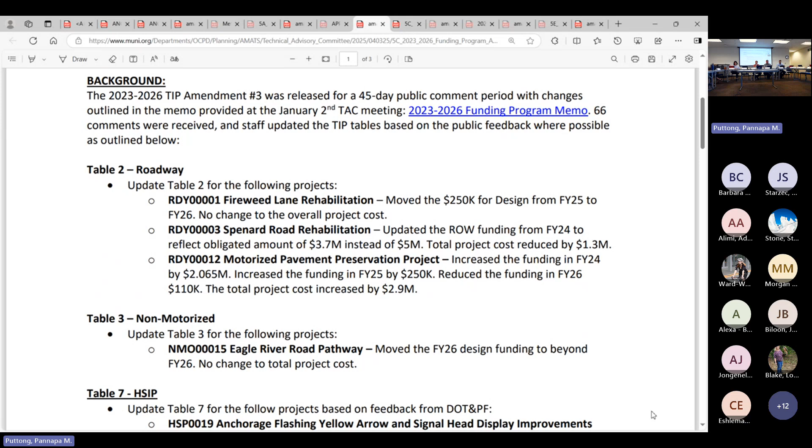I'm not going to go through every change as a way to help save time, but I did want to call out a few specific things, especially as there are new projects or removed projects. So table 7 under HSIP, we do have a new child project being added for the Anchorage flashing yellow arrows and signal head display improvements. So just more work being done there—letting people know there's a parent and child project situation for that project. So you'll see some duplication of names, but they have different TIP need ID numbers so you can differentiate them.

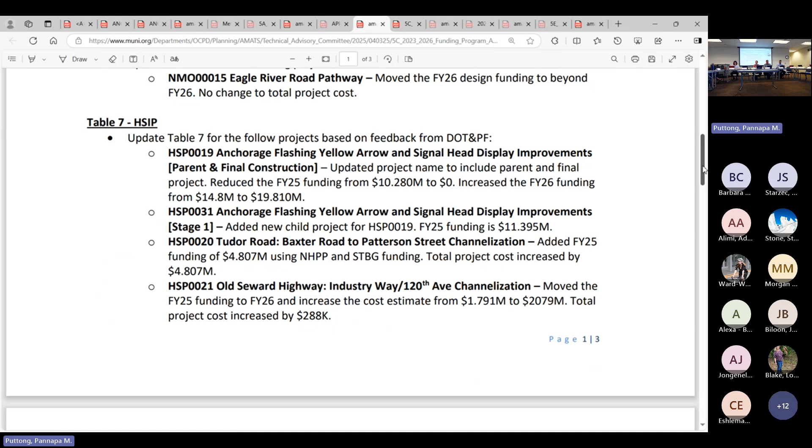We had 3 other projects added, which is very exciting. We have the Vision Zero speed limit compliance project—working with DOT maintenance and operations staff and the municipality's paint and sign shop for non-ground-disturbing improvements that encourage driver compliance with posted speed limits. It's just one of those many efforts being done to help with safety in our community. If you want to scroll down to the next page, people can see the projects.

Thank you. Next one is the Mountain View Drive safety improvements. This is a new project—AMATS nominated this project for HSIP funding. It got approved, and we're very excited to see that it is being moved forward on, making some much-needed safety improvements on Mountain View Drive.

And the last one is A Street Road Diet. This is a new project with the description to remove a lane on the western portion of the roadway between Fireweed and 9th Avenue on A Street. So very excited to see those projects in there. I believe Anna Boson is online if anybody has any questions about those HSIP projects specifically.

Yes, I do have a question. What does it mean, western portion? Does that mean the lane on the left as you're going northbound? Because that's the western—I'm assuming that's what it means. Yes.

Typically, I would think northern portion, southern portion. So I'm assuming the western side, left lane going northbound is what Anna says. Does it need to be that specific? This is the description they gave us.

So we'll go with it. If they decided they wanted to actually do the other side, are we stuck in that? We would have to update it to change that item. And as Anna says, the right lane has transit in it. Got it, so we need to be mindful of all users of the road when we're looking at removing a lane. I guess if it was just to remove the concrete barrier versus moving the curb.

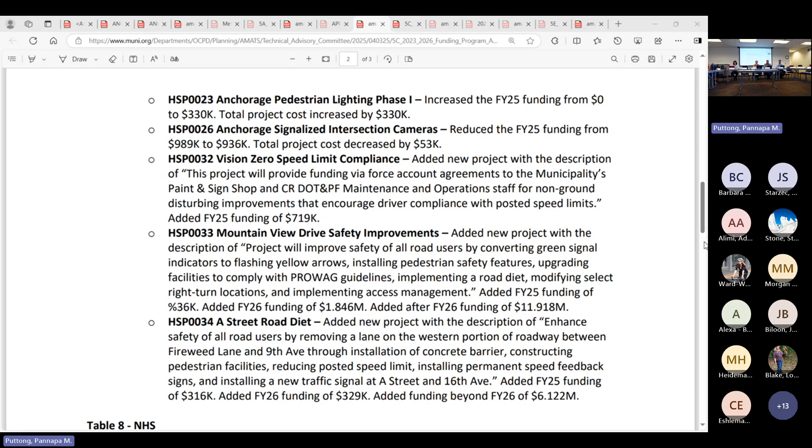Okay, Table 8, NHS. So there are some changes here. This is the predominant amount of changes based on feedback from the Department of Transportation. So you see a lot of adjustments to project costs, increases, reductions, project scheduling changes. I did want to point out that there is a new project in here, which is kind of exciting. It's the drainage improvements for the Anchorage area. So it's NHS 00017. Next page.

There we go, the very last one on that bullet there. So it's exciting to see that DOT is going to be helping with drainage issues in the community. I know this has been a big topic of discussion for everybody recently.

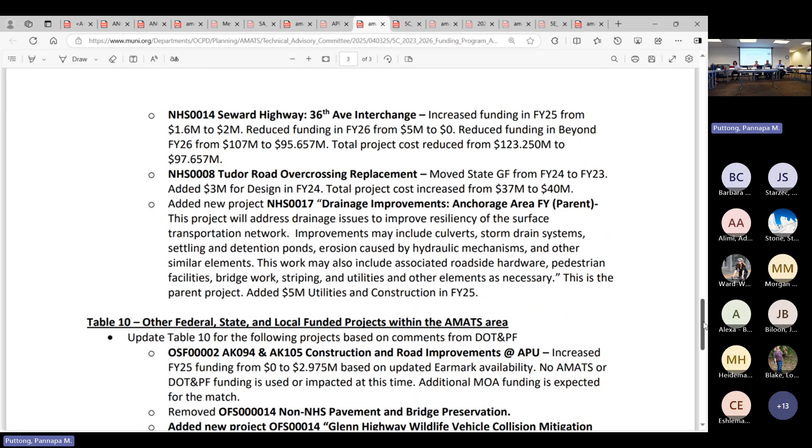There was a project removed as well. If you want to scroll up one, the bottom of the previous page. So DOT asked for the Glenn Highway 1 to 34 rehabilitation, Airport Heights to Parks Highway, Stage 1B major culverts to be removed. My understanding is they're going to be seeking other funding to make this improvement happen. But maybe Luke can provide more clarification on why it's being removed.

So this project here, the Stage 1B, was to address culverts within the second stage of construction. We thought it might be a good standalone project to go out there and address those culvert crossings in its own project, but we're just going to roll that into the second stage of construction. So it was a potential child project that will now be included in one of the other child projects. Okay, thank you. And then we made other changes to the table to help clarify some funding information.

Table 10, other federal state funding. There are two here I want to note. One, the non-NHS pavement and bridge project was removed. What's happening there is it's being folded into the pavement and bridge project on Table 8. So it's only being removed because it's being incorporated into another project, not because the work won't be done. Don't worry, my understanding is DOT will continue to do the work. It's just making it more streamlined and easier for everybody by consolidating the two.

And then a new project is being recommended to be added. It's actually a study, the Glenn Highway Wildlife Vehicle Collision Mitigation Study. My understanding is DOT is seeking a discretionary grant for this particular project—they got the discretionary grant. Very exciting to hear. This will be looking at how to help mitigate wildlife vehicle collisions along the Glenn Highway, typically done with overcrossings that are wildlife specific. However, I will note that JBER has expressed concerns about the impact to the base and its security, so it's going to take a lot of coordination between all the parties for this study. I, for one, am very looking forward to this and hope DOT will include AMATs on the study project team.

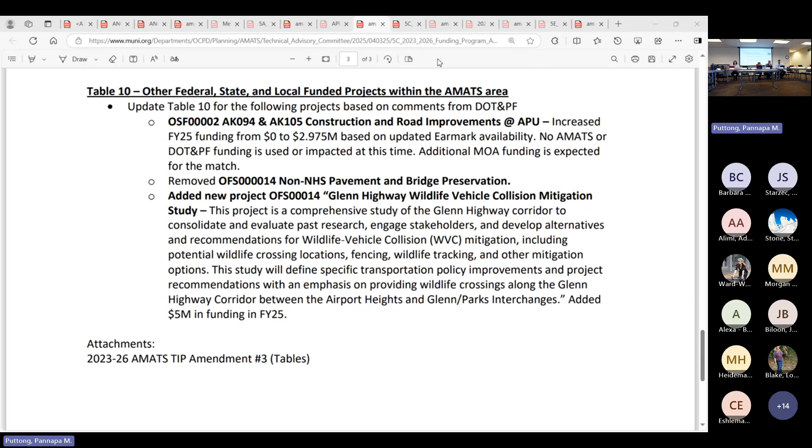Last, it's not on the memo, but I just wanted to make a note for everybody. Some of the comments we received were given to us in a format that wasn't the most helpful—it was very lengthy and time consuming for staff at both DOT and ours to review. So I think moving forward we're going to develop a template for our partner agencies if they have any changes to their projects they'd like to submit. They can fill out that template in an easier to use format so we're all consistent in what we're looking at. The hope is to make it take a little less time to get these things done.

As I ran out of time, there are some minor errors I will mention. When we made all the technical changes on the funding amounts, I forgot to update the phasing plan for a number of projects. So if we moved funding from FY26 to 25, I didn't update that design would be moved up a year. Between now and the PC meeting, I will review everything and make sure the phasing plan information is updated accordingly.

So I'm happy to help answer any questions, but that's what I have. And the recommendation here is to review and recommend tip 3 to the policy committee based on the public feedback.

Thank you. Okay, are there any questions or comments from the committee?

Go ahead, Miranda. Could you give an overview of what was the bulk of the public feedback, highlights? Yeah, so a lot of the public feedback was really provided to us from Department of Transportation.

Did we not post the comment response summary for the tip? I do not see it here. Well, we will make sure to do that for the policy committee. Hold on just a second while I try and find that.

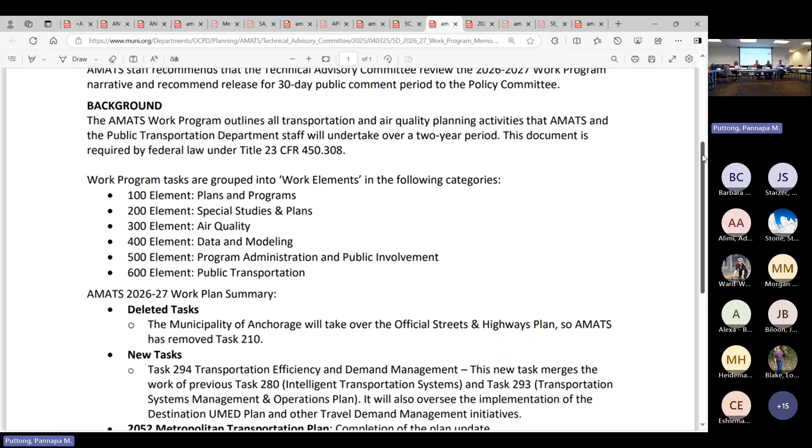One of the main things we did is we actually deleted task 210, the official streets and highways plan. The reason is the municipality of Anchorage planning department, the long range group, is taking over the official streets and highways plan. AMAT will still help and assist where needed, and that will be covered under the local transportation coordination task.

Then we have some consolidated or new tasks, one new task: task 294, transportation efficiency and demand management. One of my favorite things ever, so I love that we have this in here. Basically what we did is consolidate a couple of tasks: task 280, intelligent transportation system, and task 293, transportation system management and operations.

We also moved anything under here for travel demand management. The idea is to have one task in our UPWP that focuses on demand management or transportation efficiency. So anything that's ITS, TSMO, TDM, we put under this one task. It makes it a lot easier for accounting purposes, a lot easier for the public, easier for staff, for everybody, to just say where do I go if I want to find out more information on what AMAT staff is going to be doing about transportation demand management. It's in one location, so we're pretty excited there.

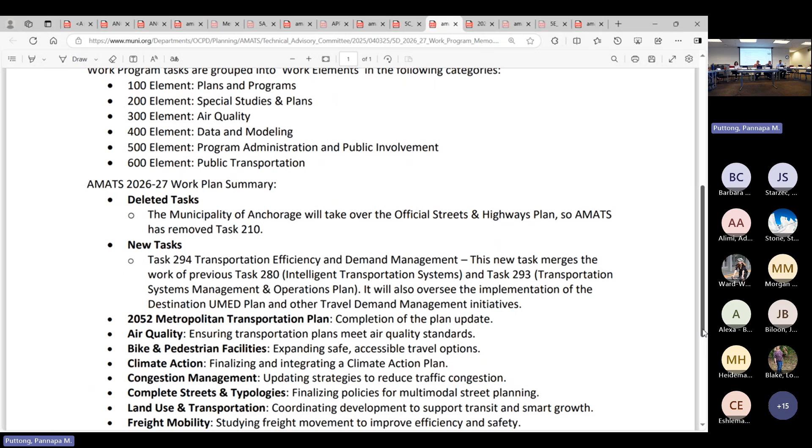We made a number of updates, as you can see here. The MTP, we added that we're going to be working on it. Land use and transportation, freight mobility, we're going to be updating. And then we have the interactive tip tool.

I will let you know that we were not able to get the interactive tip tool done, or will not be able to get it done this fiscal year as part of this UPWP. A lot of work is going to need to go into that. Apparently nationwide there are not a lot of pre-made tip tools—typically it's just an add-on to a STIP tool that's out there. So we are working on getting more information on a tip tool and getting a consultant on board to help us develop one. We may not have it ready for the start of the next tip cycle, which will be happening here in June already.

So be prepared for that, but it's something we want to continue to work on and integrate, and do things like have maps attached to all of our projects. Have a tool that's easier for the public to use, to be able to ask what's happening with this project, where's the funding, where is it at, and get a lot more information out there for them.

There's a lot more here, but that's all we have. What's being asked here is to recommend release of this for a 30-day public comment period to the policy committee. It'll go out for the public to review, and we'll also provide it to our community advisory committee for their review. Then we'll bring back any comments there in June at this point for final approval.

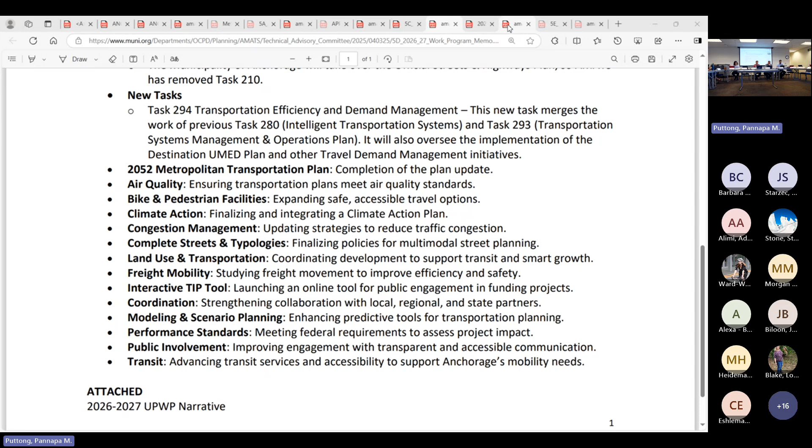Hey everybody. As you see, our agenda has been pretty full today, so I apologize for that, but it's just one of those months. So this item is before you. DOT is currently working on updating the functional classification for all roadways in the state, and we have the website there for anybody with any interest or questions on that. Quoting from them, Alaska DOT is responsible for making sure all public roads in the state, regardless of who owns them, are properly classified using guidance from the federal government, which we have a link up there, and input from communities, tribes, and agencies.

They're required to review the functional classification every 10 years, and they're in the middle of that process now, so it aligns with the census. As part of this, DOT has been working with different stakeholders. AMATS is one of those stakeholders, and has asked if AMATS has any comments on this functional classification.

One thing to note is when we're looking at the functional classification, we're looking at it as it stands today, how the road functions now, not how we want it to function in the future. Keep that in mind as I go through the next information. I know there is some desire to make changes to the functional classification to help with redevelopment and other things, but we just have to do an analysis now. As it was floated to me, it's very much like, what is the status of the system for the functional classification?

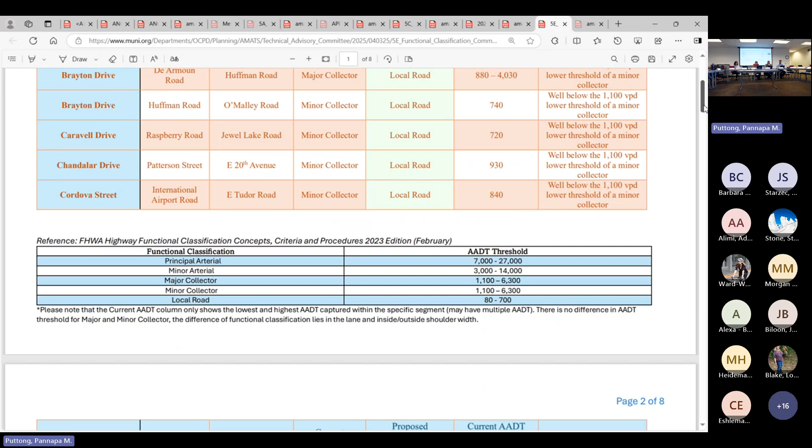Next page, let's go down to page 3, please, and if you can scroll down to Fireweed Lane. Okay, so we have Fireweed Lane in here. It's currently classified as a minor arterial. We're recommending it be a minor collector. The reason for that is there is a project underway to rehabilitate Fireweed Lane, and the project team is actually looking at helping design it as a collector. So looking at the information, looking at the ADT, we reviewed it, and our recommendation is a minor collector.

What really matters here for major and minor collector is that there's no difference in the thresholds, but there's a difference in the lane and inside and outside shoulder widths. Any more information, Zach will have to help with that. Sorry, there's only so much my brain can keep track of.

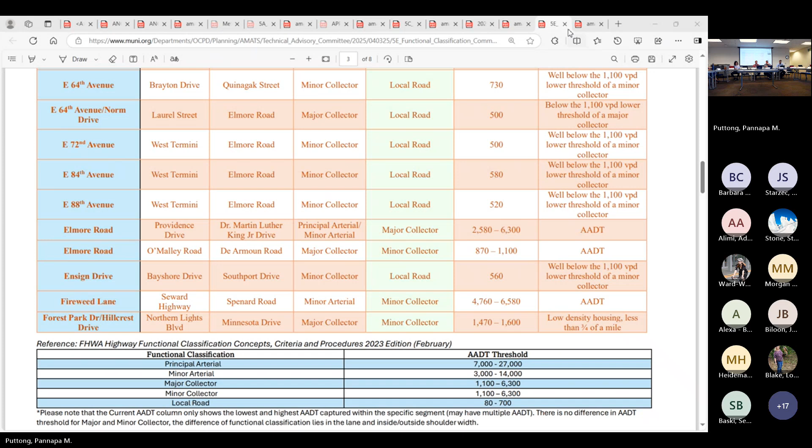Okay. That means that we move now on to item 5F, the I and L pavement preservation project. Yes, okay, do you guys have your presentation?

So, just so you all know, we have a pavement preservation project underway by AMATS, or funded by AMATS, with the Department of Transportation, and it is for I and L from 3rd to 15th Avenue. This project starts as a pavement project, however, as we've been out there working on the project, there's been some desire to maybe do a little bit more work. Both the community and DOT and AMATS staff have been in discussion regarding this or have provided comments on it.

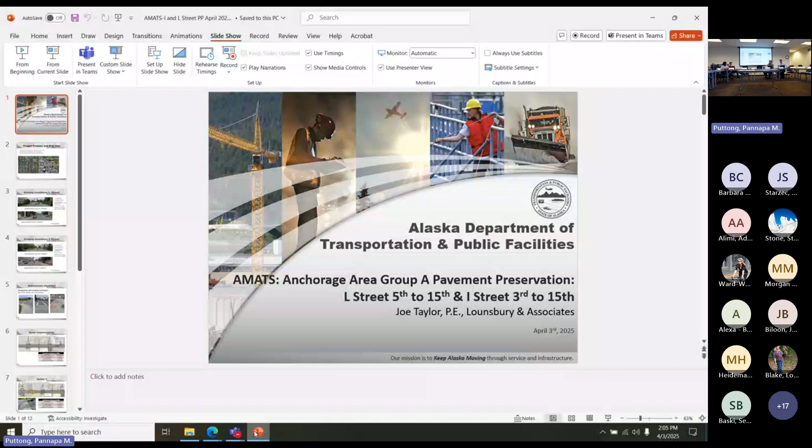There are kind of 4 things to think about for this project, as you'll get a presentation on it: whether we keep this as a basic pavement preservation project, whether we do preservation plus ADA upgrades, or if we add signal modifications or lane reductions. So the consultants will give a presentation on this, but the idea to keep in mind is, do we want to make changes to this to make it more than just a pavement project and do more while we're out there? Or do we want to just keep it a pavement project and get it out the door faster?

So I can take over whenever you're ready. Great, appreciate it, 10 minutes, is that good? Yes, if we could, please. Thank you. Good afternoon, everybody. Hello, Joe Taylor with Lounsbury & Associates, here on this project. Aaron did a good setup for us here.

Like I said, it's probably a pretty deep dive on the packet, and I'm going to go through those in the slide deck here in a minute, but I want you to have the real detailed information.

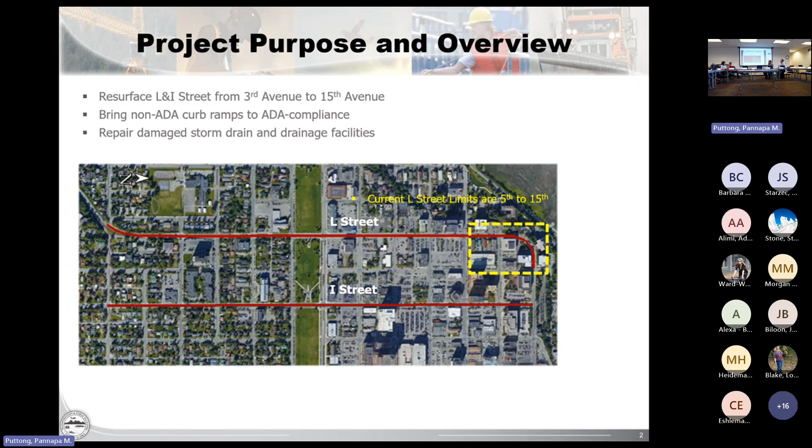But really briefly, L and I, two corridors, we're thinking of these as a couplet, sort of 3 lanes into downtown, 3 lanes out. The idea here is that these 2 different projects are being sort of delivered as one. The limits are from 3rd to 15th. And this project's mission right now is a basic preventive maintenance project, so we're dealing with stressed pavement, signs, stripes, ADA curb ramps, and storm drain. It's really what we're focused on. Next slide.

Briefly, I've got 2 slides that show this real quick, but the big concept to be mindful of here, I'll get to at the end of the presentation. Both routes are 3-lane facilities, and there's a real distinct break and feel at the park blocks where the roadways change their nature. South of the downtown park strip, we have a 3-lane facility with a little bit of flexibility. You can see in the picture up top, we've got a little bit of green space or sidewalks. It gets even more flexible as we head down the hill to 15th. As we get to the park strip, we get much more urban, start picking up on-street parking, a lot more concrete, a lot more paving.

I'm going to show you a typical section here in a few slides that sort of rethinks that. We just want to be a little bit mindful about how that changes, a little more flexible to the south, a little trickier as we get into the downtown area.

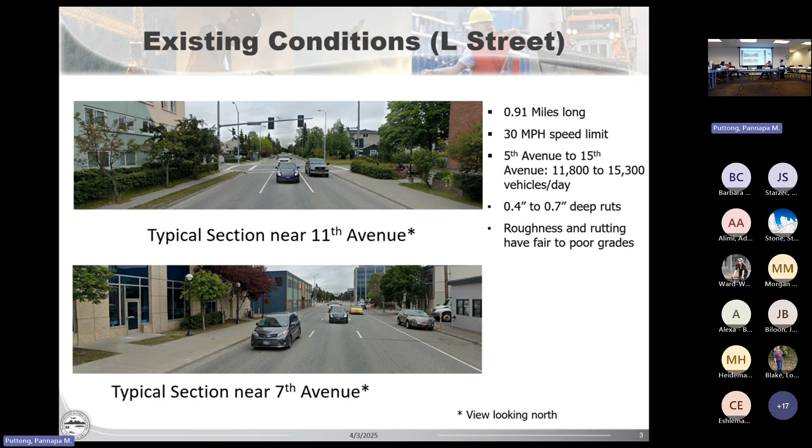Fairly poor pavement, getting some deep ruts here on L Street. The next slide is just a quick shot of I Street, very same concept. You can see as we get into downtown, we start picking up on-street parking and just much more urban, much more developed as we get south of the park blocks. We've got bus stop amenities and a little bit of green space.

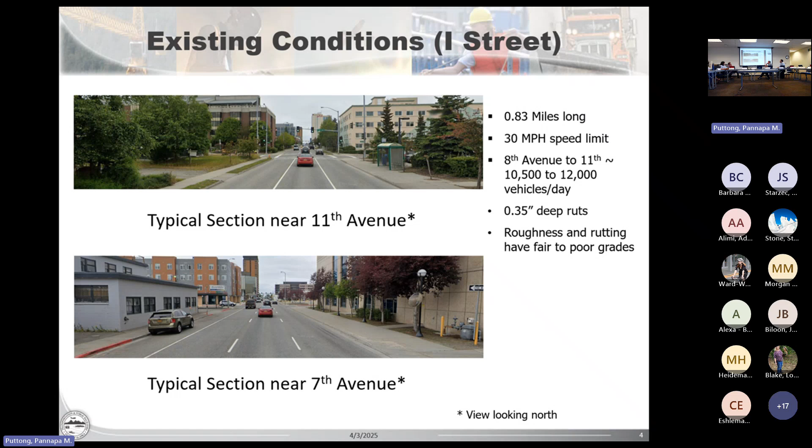So both routes are exactly the same. Next, please.

So we did pick up about 108 curb ramp issues when we inspected the curb ramps, probably last fall. Most of them had repair recommendations, things that needed to be repaired. We are finding some that don't meet grade, we are finding broken concrete, missing tactile warning tiles. So quite a bit of work to do there, in addition to the asphalt and the drainage that I mentioned earlier.

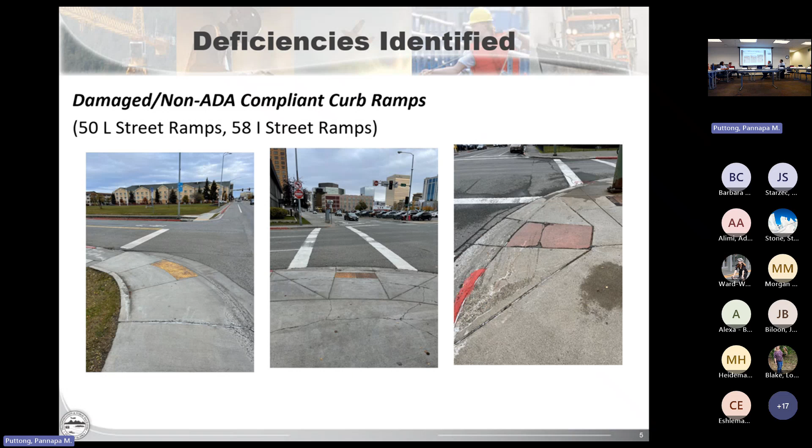So in your packets, we've got L and I Street. You've got each in a packet, and it just shows a roll plot and a basic layout of the pavement preservation project, the basic charge that we're under to deliver on this. Signs, pavement, storm drain, curb ramps, about $6 million plus or minus for either route.

And the one thing I want to stress is we don't have our storm drain work done yet. You'll probably see, if you're paying attention in the next day or two, we've started to hood the downtown parking meters. Our guys are going to be out there inspecting and doing their storm drain inspections right now. I hope to, and I expect to, drive that number down a bit. So that's a pretty good conservative number.

It's based on replacing storm drain, not rehabbing it. We're going to try to do trenchless work. So every number we present here today is built on that kind of conservative assumption. But about $6 million for either corridor is the basic charge.

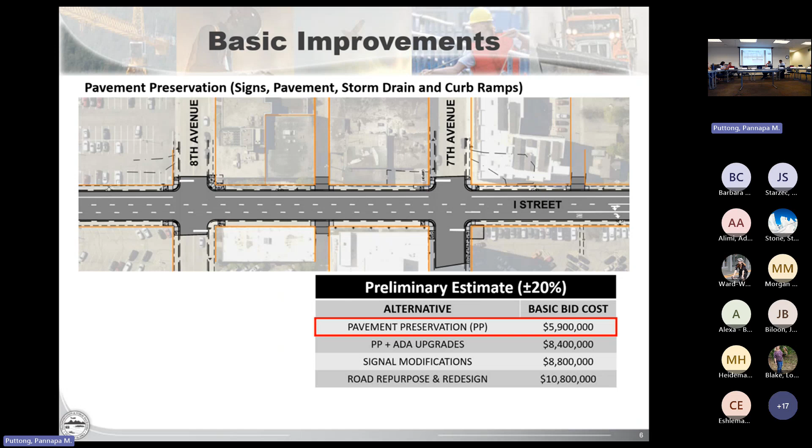As we've been working on the project, it's become very apparent that there are a number of well-known and well-identified needs on these two corridors, both from the public and the agencies. A number of things have come to the project team, and so what we were charged with and asked to do was develop this menu that you have in front of you of different incremental steps that we might add to this project in the spirit of a preventative maintenance project. Then we have one at the end that is a sort of repurpose and redesign that I'll get to.

So option 2, this is very similar to what is being done on the Northern Lights sidewalk project. The concept here is we do the basic preventative maintenance, but we go after the things that we know aren't meeting current ADA. So we found a number of pieces of sidewalk.

Here's a little pop out there. In your packets, we've circled in yellow every piece where our sidewalks are deficient. They don't meet grade, they're too narrow. So this concept gets that sidewalk and tries to get it up to standard. With that comes working on the driveways that are too steep and don't meet grade.

You'll notice a pretty big jump in number from the basic pavement preservation to this upgrade, about $2.5 million. Certainly a lot of that is in concrete and sidewalk and pavement, but this option includes adding audible push buttons at our crossings. That's an agency identified need. There's no signals, we don't have push button signals at our intersections right now. So it's a little bit of a big lift in that we get into electrical, we get into a much deeper piece of work, and that's what's driving that.

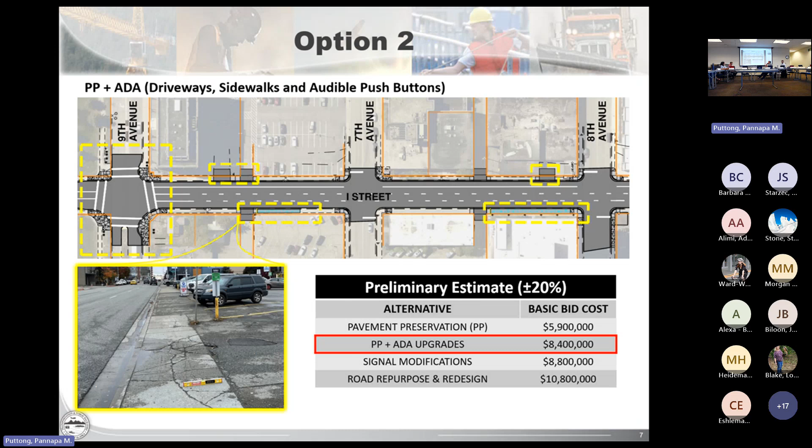But when I go to option 3 on the next slide, this is a concept that builds on that, because in option 2, when you make the investment for the electrical upgrades, which comes with new controller cabinets, once you've made that investment, putting additional things into the system becomes incrementally easier to do. So option 3 is a concept where we do basic pavement preservation.

We do the ADA that I was talking about in option 2, including the electrical work. But here in option 3, there are very specific needs in addition to just the audible push buttons that the agencies have identified. One is right here at New Sagaya on this pole, this pop out that I'm showing here.

We've got a load center attached to a pole. This is a dangerous situation. If we were to have a crash there, we would have electrical lines in the street.

So these are very specific, very detailed. There's a couple intersections where flashing yellow arrows have been identified. I think the PTZ cameras are already being handled elsewhere, but radar detection has been identified here. So an incremental step from the last option, but plugging in some real specific asks here.

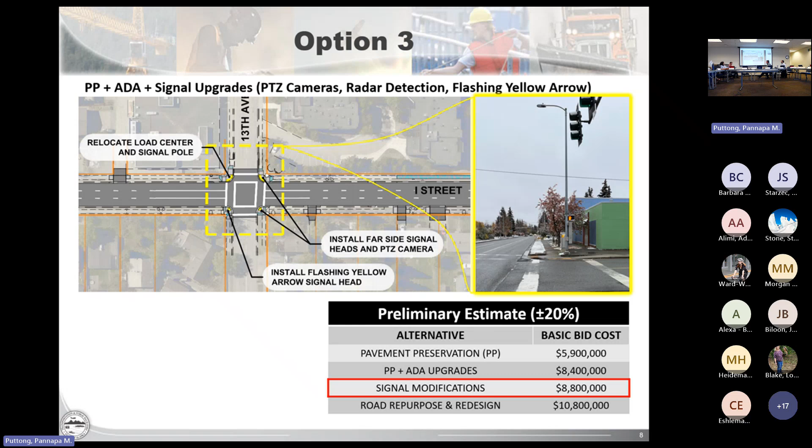And then when we get to option 4, this is a completely different concept. The project team was asked to look at an option that repurposes the roadway and redesigns that typical section.

In this concept, I'm going to show you a typical section. I'll explain this, but I'll talk through a couple other ideas that have been discussed. In this idea, one lane on each route in the couplet would be removed, and there's a couple ways that we could do that.

In this case, what we're talking about is moving the curb line. So you see those numbers really jump even more from the previous options. That's driven a lot by reconstructing storm drain and all of the subgrade work that would have to be done.

The idea here is we learned from our pilot project — I think the city learned a lot of benefits from the pilot project last year. If you don't need all of the lanes, you can bring friction into your corridors, slow your traffic, bring your noise down, and make a much more comfortable environment for everybody.

And if you have that space, there's a number of things we could repurpose or reallocate that space to. One is simply snow storage — we've been hearing about that on all of our projects. Just having space to plow snow in the wintertime would help everybody.

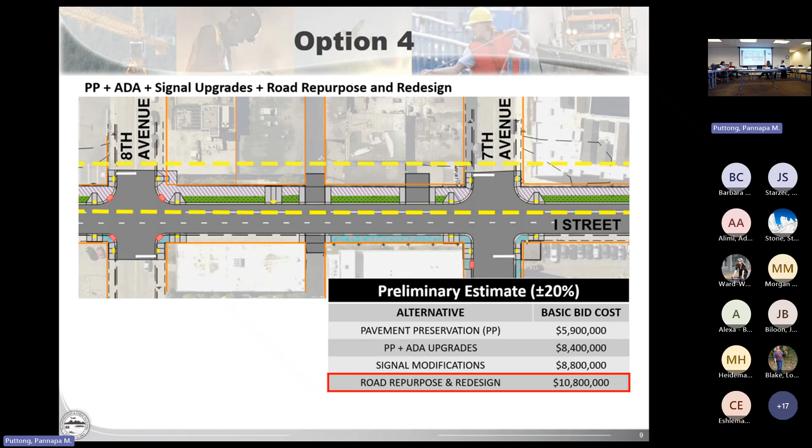It's pretty easy geometrically to do on the south part of the corridor, where I was talking earlier about there already being green space. As we get into the urban environment downtown and things are more built out, we have to be smart about how we use that green space to make sure we're matching grades at the back side of the pathway, because it's all built out and we can't be raising grade. But it is doable — this comes with redoing storm drain and reconstructing a lot of that.

So picture this — that's our worst case scenario for cost. But here's another concept or idea we want to talk through. It's kind of hard to draw and show.

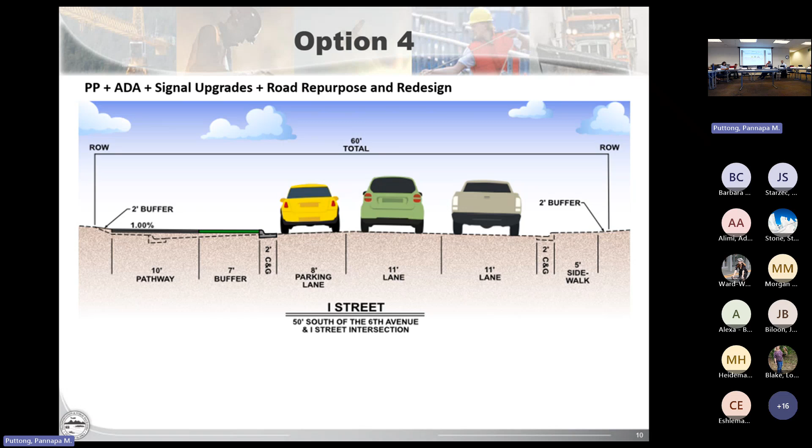Okay, so I've shown all these examples off of I Street. The packets are a detailed layout of both I and L. They're very, very similar. But really, this brings us to the last slide of our presentation, the reason why we're here today.

And just real quick, there was another option 5 that was tossed at us. Most of these signals were made or installed in the 80s, so they're at the end of their life. We're already potentially doing major rework on almost all the signals and the cabinets and everything else. So there's another request to potentially rework all the signals as part of that. We don't have a cost for that, but that would be option 5, since you're already redoing most of it.

They were put in in the 80s. Do we go in and revamp it? We know we're going to have to do that at some point in the next 10 to 20 years. We either need to start tackling it on a project by project basis, or a lot of the stuff is already available.

And then another quick note on option 4. Typically, we're looking to local governments when we do complete revamps of the typical section, for local governments to take on ownership of those facilities. We'd probably want to have a quick discussion about the implications of something like that at some point. I know there's requests for some of the downtown streets to be passed over to the muni, so this might be another one of those discussions, if we're giving it a new lease on life in a smaller functional classification kind of style.

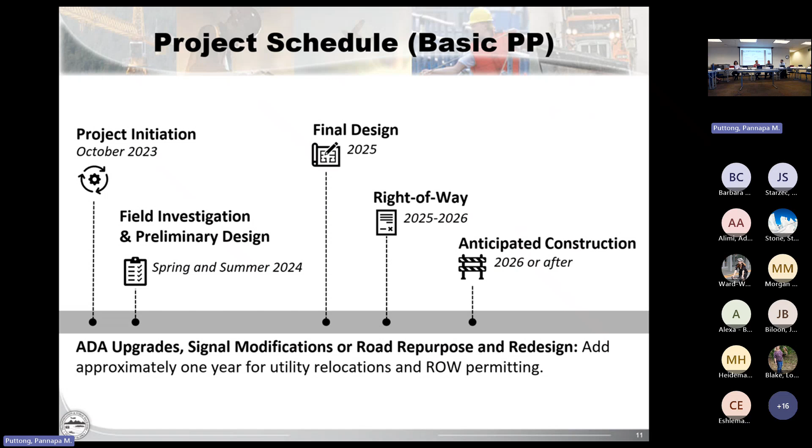Sounds good. Thank you for the presentation. Are there any questions or comments from the committee? Go ahead, Lisa. I do have a question for the team.

If option 4 were the preferred option and that pushes the timeline out a couple years, is there any consideration for some temporary installation in the meantime that would reduce, remove the lane and allow it to figure out between now and then how it functions?

I mean, there's a potential option with a pilot project that we could throw something in, but that would likely only be for the summer or something like that. Resource-wise, we can do anything that the committee desires, through policy recommendations through the TAC. The thing I would warn is everything's behind schedule right now, so if we start doing other interim projects, it will affect not only other AMATS projects, but the delivery of this project, it'll divert resources away from it. So anything's possible, there's just implications.

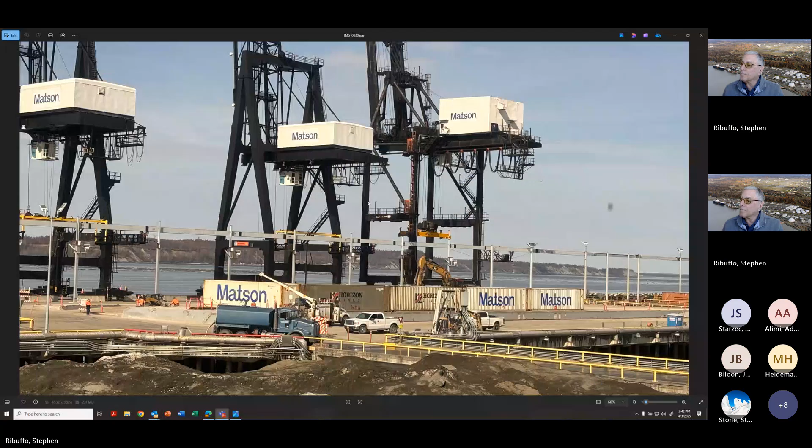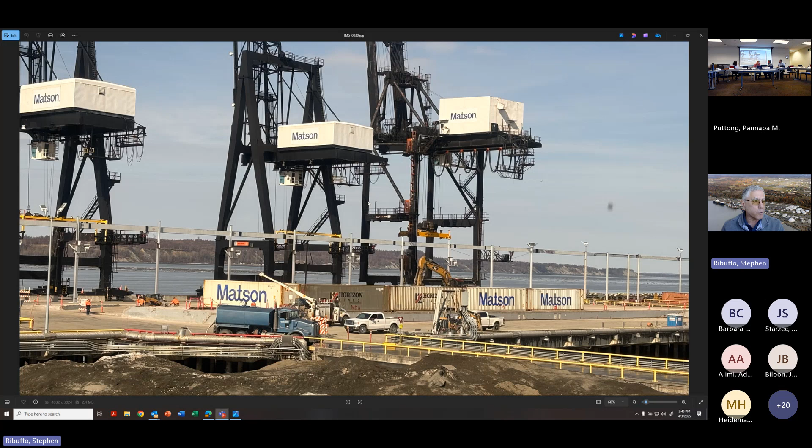Okay, can everybody see that? Since you need an engraved invitation to come down to the port, I thought I would give you a little bit of a visual progress report on where we are as of today on the first part of demolishing and replacing one of the cargo terminals for the first new one. What you're looking at is basically what used to be the transit shed and the old port offices.

CEI has had the demolition contract. They started very early in March, and nothing is left. As of today, they're doing some cleanup work on the foundation for the buildings that were originally on the dock, but pretty much everything there is gone. And when I say everything, I'm talking about that which was here in September 1961 when they cut the ribbon on the Port of Anchorage. So all of that vertical structure is gone.

We will use this area for staging some of the construction materials for construction of the first cargo dock, which is going to happen waterside of where you see those cranes. So things are changing, and I know it's been a while since some of you may have been down here, so I thought I would share. Thank you.